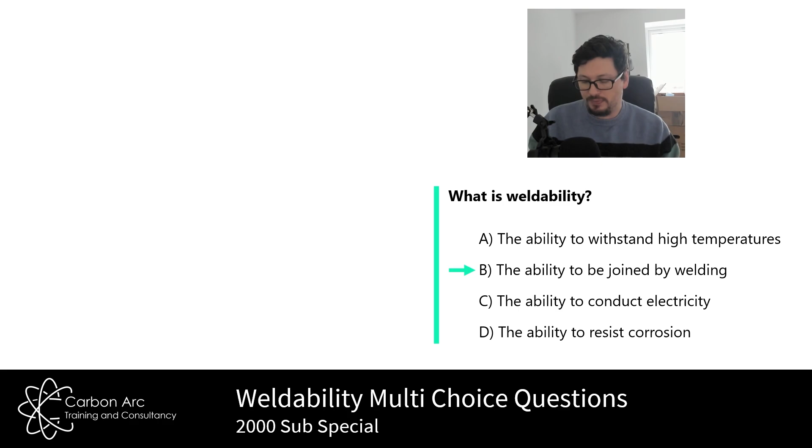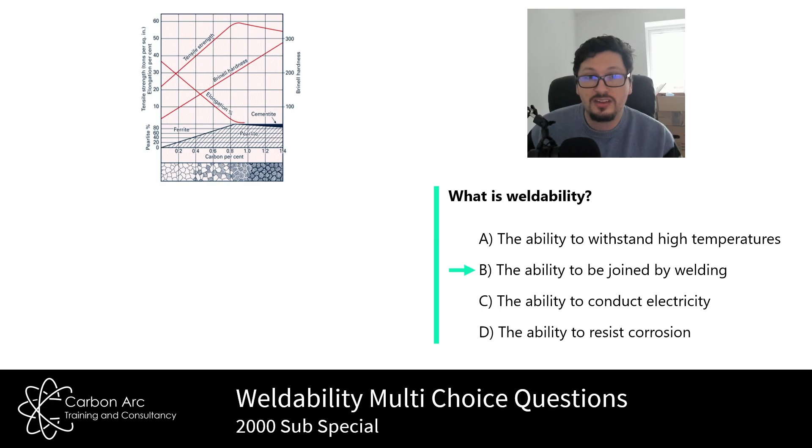Other questions that come up around this are things like: what is the term for the ability of a material to be welded without cracking? That would be weldability—same answer, different way of questioning it. Because we've got that increase in hardness, the lower the weldability, the more likely it is to crack because it has a higher carbon content.

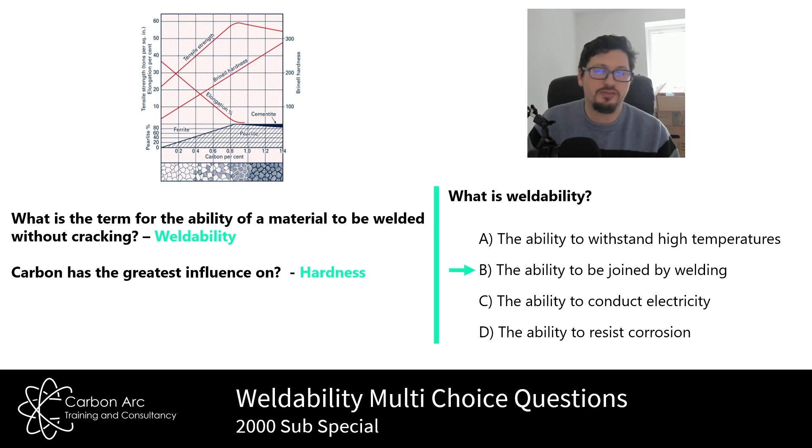Carbon has the greatest influence on hardness, right? Strength is always there because we add carbon to the system in order to give us strength. But really, in weldability we're worried about the hardness value of that grain structure it produces. An increase in carbon will require an increase in preheat. So by far the biggest control we have here is: as carbon content goes up and weldability comes down, we increase the preheat value to get more heat into the structure, so it cools slower and is therefore less likely to crack.

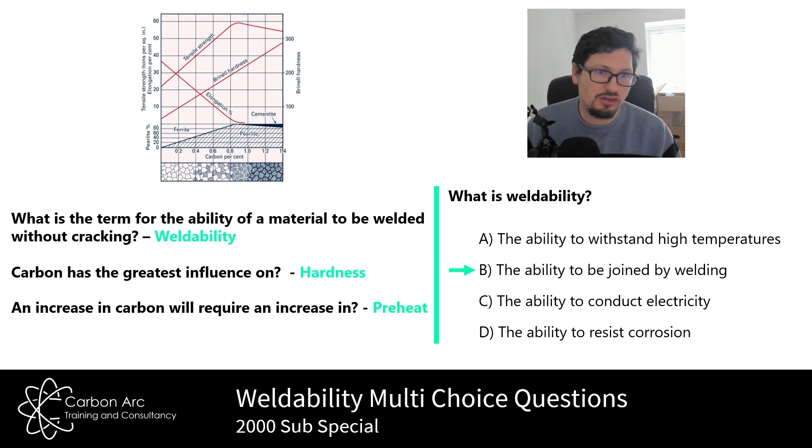So, second one: which factor does not affect weldability? I've seen this question around quite a lot. It's a difficult one because I would potentially err on the side of everything affects weldability to a degree. But if you get a question like this, 'which is the least likely' would be a good way of answering it. So how could we look at this and drive it forward? Which factor does not affect weldability: material composition, welding process, ambient temperature, or welding position?

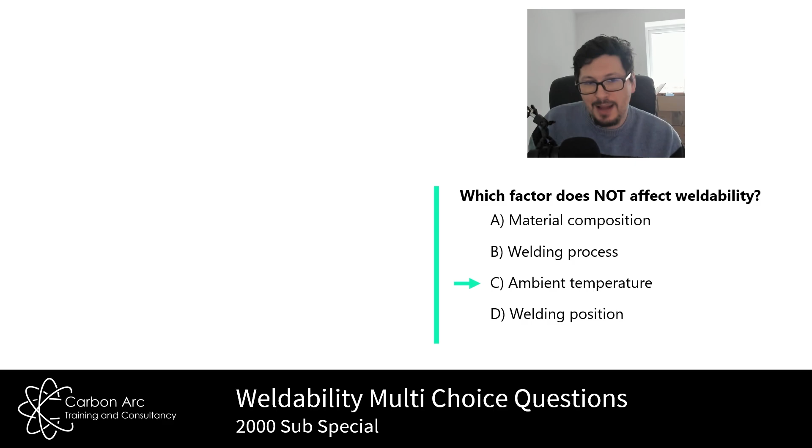If we've already decided that weldability is the process in which we join materials, and good weldability needs less control while lower weldability needs more control, we can use that to ask: if I change these, what's likely to happen? I would go with ambient temperature as the answer. Material composition instantly triggers the question of alloying content—something with higher alloying content might have more carbon content, going back to that previous graph. So material composition is always going to affect weldability.

Welding process: different welding processes might affect the amount of heat input they produce, and if we're talking about preheat levels and heat into the process to stop cracking, some materials just won't weld with certain processes, or they're easier with others. So the answer is definitely not welding process. Ambient temperature—you could say if I've got a low ambient temperature I'm going to need a bit of preheat, but that's true for all materials, whether they have good or poor weldability.

You often want to get them above 10 degrees before you weld anything, to stop thermal shock and distortion issues. And the last one, welding position—well, welding position might affect welding processes, preheats, heat inputs; some welding processes won't work in certain positions. So the best answer here, I would say, is ambient temperature. It's not a great answer, but it's the best one.

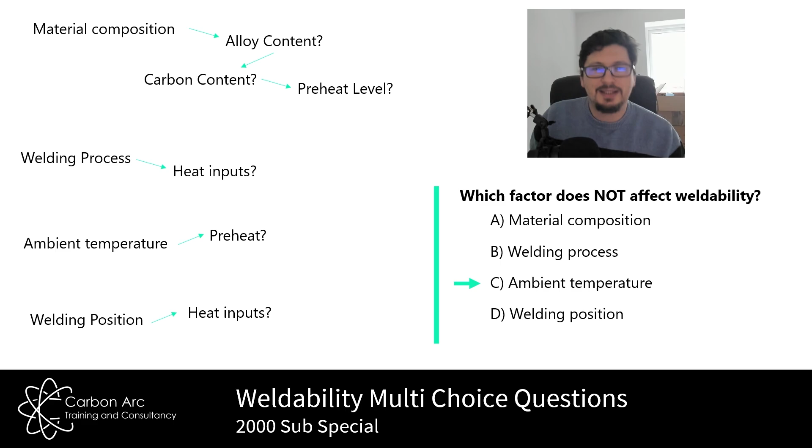Which material is generally considered to have good weldability? We've got cast iron, stainless steel, aluminium, and titanium. So again, weldability is the process in which we join materials together - either with low control and get a good result, or with lots of control to have a good result.

Which one would be good or poor weldability? Well, cast iron - it's got a high carbon content, multiple percentage points of carbon. Therefore it's probably low weldability. If you try to weld cast iron, very often it cracks, and that's it, it doesn't work. You need very high heat inputs, very slow cooling rates to really have a chance, and some grades just won't weld at all.

Stainless steel and carbon steel, your standard carbon manganese steels, are really quite straightforward for a lot of the lower strength value ones. For stainless steel you might need to back purge the root runs and things like that, but we have quite a range of welding processes that can be used. We don't need to preheat because there's a very low carbon content - it's generally quite easy to weld without cracking, because that's weldability, remember: the ability to weld without it cracking.

On the list here we've got examples of the things I've talked about: cast iron has poor weldability due to high carbon content. Stainless steel doesn't need preheating because it has a very low carbon content, especially grades like 316L. Aluminium - some grades hot crack, the 7000 grade doesn't weld because of hot cracking issues. Titanium requires a lot of care to keep it clean and oxidization free, so that's relatively difficult.

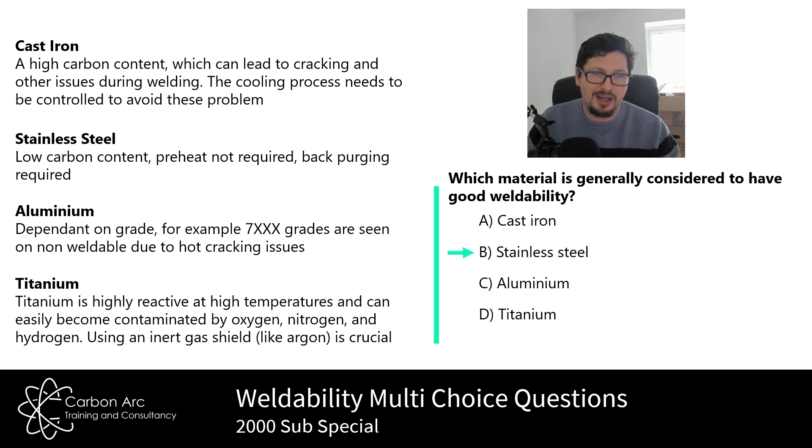Next: what is the main concern when welding high carbon steels? These questions have been sent in to me - I would maybe reword this as, what is the main concern when welding high strength carbon steels? Here are the answers: high melting point, formation of brittle martensite, low thermal conductivity, or high electrical resistance. The best answer here is high carbon content being more likely to produce martensitic structures, so the answer is B.

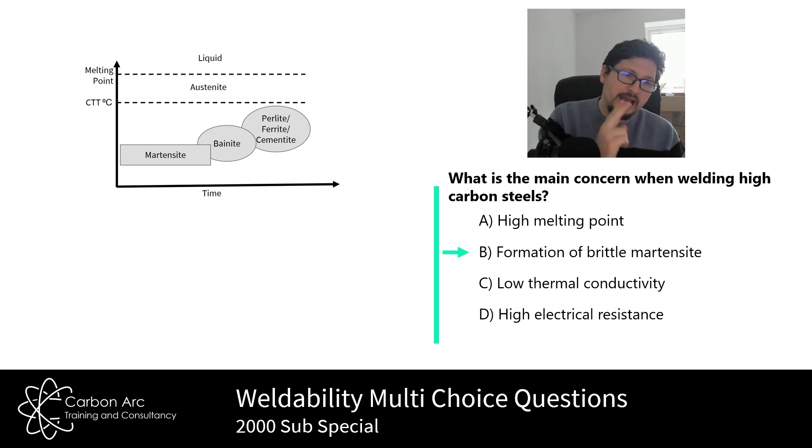If you want to know more about this, you need to learn the time temperature transformation graph. If you've been on one of my courses, you know I love this graph - I think it explains a lot around weldability, hydrogen cracking, and things like that. The controls we have in WPSs can be explained through a TTT diagram, and we already have a video on our page, Cooling and Its Effect, TTT Diagrams 101. Basically, as carbon content increases within a material, the martensitic band of that TTT diagram increases - it gets longer, pushing the whole graph to the right.

This means that for the same heat input, to try and get a pearlite, ferrite, cementite structure - a good grain structure - we're going to need a much longer cooling time. So we'll have to have a higher preheat value as we fall into that. High strength carbon steels generally need high preheat values and slow cooling rates.

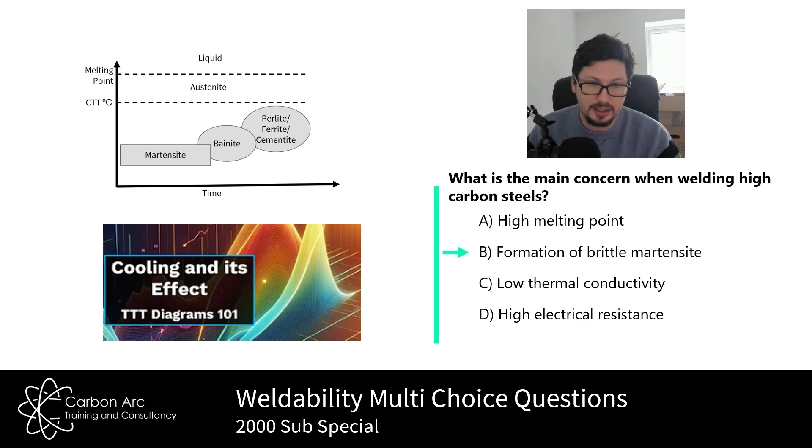Which welding process is known for its high weldability with most metals? Which welding process can we use across most materials relatively easily? My answer - the answers first if you're just listening - are gas tungsten arc welding (TIG), shielded metal arc welding (MMA), gas metal arc welding (MIG-MAG), and flux core arc welding. I would say the welding process that can be used over the widest range of materials most easily is TIG welding, gas tungsten arc welding.

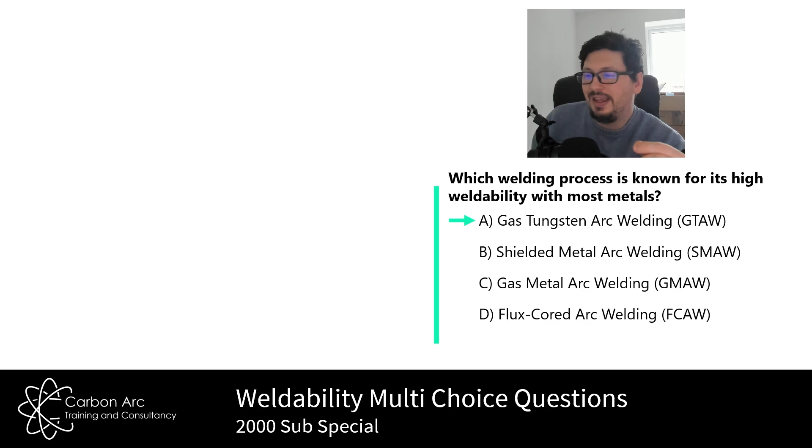The ability for TIG welding to use filler wire or no filler wire is second to none, because it allows us to weld materials that may be very thin, or where we don't have a filler material to join them, or adding filler might cause issues - lots of different reasons. On the slide you'll see a list of 7 reasons TIG welding is generally good for most things. The problem, though, is the deposition rate.

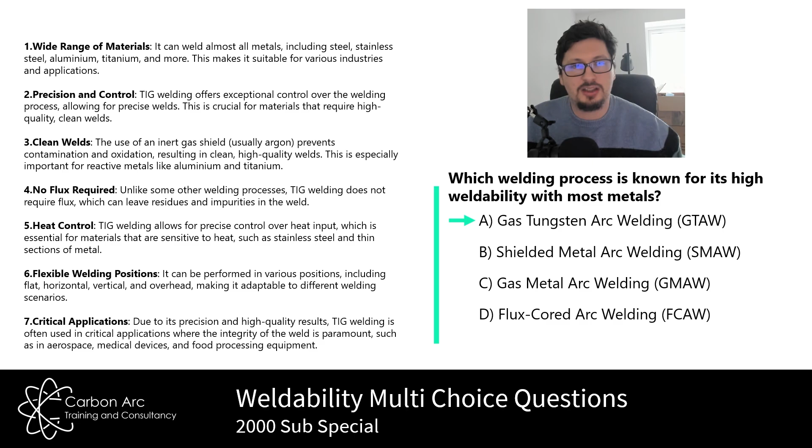The amount of weld metal we produce per hour is tiny compared to the other welding processes, which causes an issue when we look at cost. It also has a higher skill level requirement compared to other processes, so cost goes up again with skill and time - efficiency is relatively low. But generally, when in doubt, TIG weld it, and you should be able to control the process enough to overcome weldability issues and weld the material.

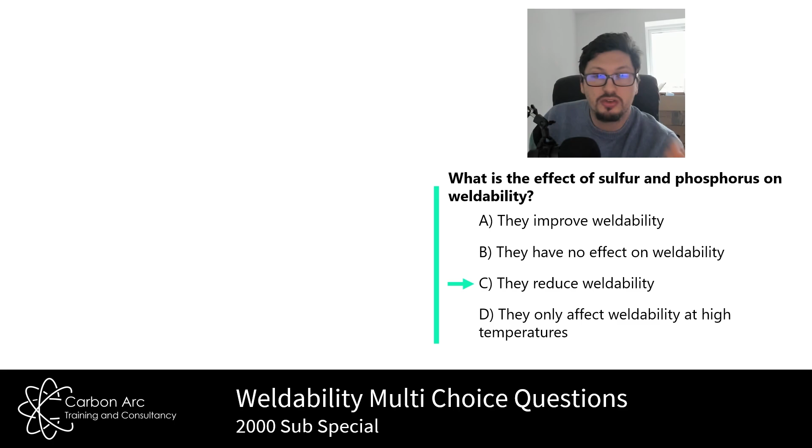Next one. What is the effect of sulfur and phosphorus on weldability? So will they improve weldability? They have no effect. They reduce weldability, or they only affect weldability at high temperatures. So they do have an effect on weldability, and they're for two different things, okay? But they're going to reduce the weldability of our material, okay?

I think here I've got phosphorus, okay? It's a residual element, which means we try to get rid of it as much as possible, right? The thing here with phosphorus is once we weld it, it generally produces what we call cold shortness, which is when we take a material and we try and form it, we try and bend it through, say, 90 degrees, and they crack, okay? High phosphorus materials, we don't really want that.

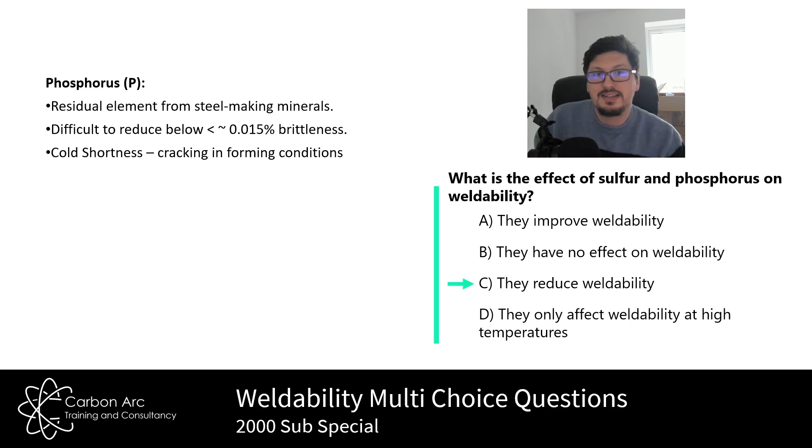Now, sulfur connects into a lot of failure mechanisms in different ways, okay? The most common one we talk about sulfur with is solidification cracking. And again, we try to remove sulfur in steels we know we're going to weld as much as possible. And this is where a lot of cost enters the system in steel manufacture to drive the sulfur level down.

So sulfur mainly is solidification cracking, but has a play in lamellar tearing and sort of inclusion creation and stuff like that. Yeah. Solidification cracking, lamellar tearing, inclusions, sulfur, non-metallic sulfur is our issue. Yeah.

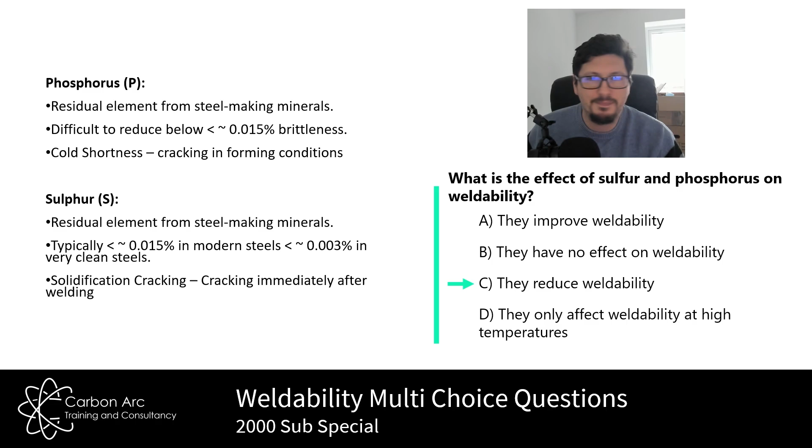Which of the following is a common weldability test? So before I give an answer, right, yet again, ask the question, what is weldability a measure of? It's the ability to weld it without cracking. Why do we get cracking? Well, we get cracking because we have a high carbon content, which then leads to potentially a martensitic structure, which is more likely to crack. So hardness values go up with a martensitic structure, right?

What test is going to find hardness values? All right, our answers here are tensile test, Charpy impact, bend, or hardness tests. Yeah, so because we understand the process of what weldability is, we just know the hardness test is going to be the answer, right? But again, on the slide here, we've got tensile tests. So tensiles are used to understand yield, tensile, and elongation of materials.

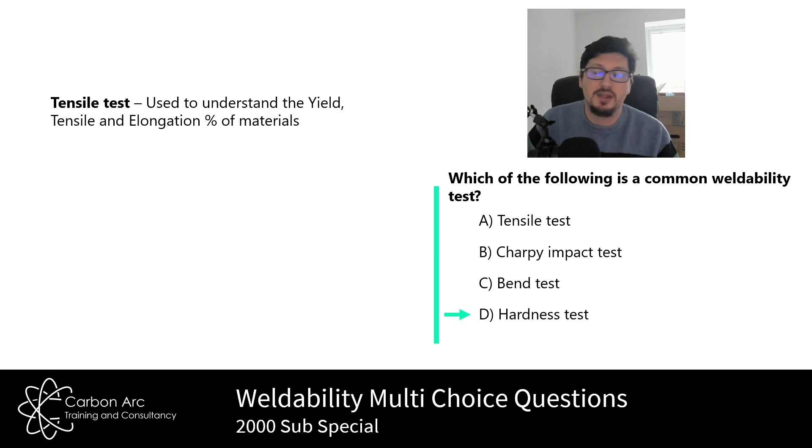Charpy impact tests are used to understand the transition point between ductile and brittle materials at a test temperature. So we have a dropping temperature, which then finds that point at which it becomes brittle, and we don't want to go past that. We've got our bend tests, which is a qualitative test used for understanding ductility, and our hardness test, which says, okay, how hard is this material after welding? And we can test in the base material, the heat affected zone, and the weld metal.

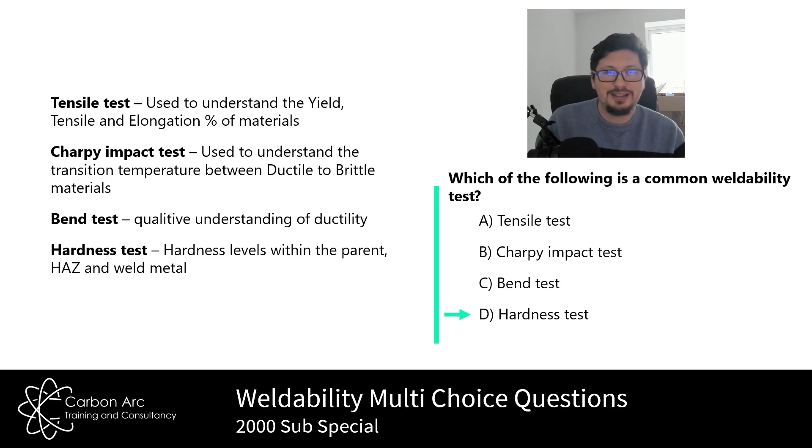Our different standards give us different levels for this. You know, if you look, say, in 15614, the ISO spec, it's saying a hardness value of 380 for sort of normal materials, so normal carbon steels. Can't go above 380 hardness, because above 400 we're likely to have martensitic structures. So we can hardness test something, and if the parent material is really hard, the probability of weldability being poor is increased.

Okay, so what is the primary, I can't even say it, you know. What is the reason for preheating before welding? So slowing the cooling rate, if we think about a TTT diagram, is going to push us into the pearlite, ferrite, and cementite regions. We don't want to get into martensitic regions.

So preheating adds heat, which slows the cooling rate. That can be helped if we then add blankets on top of things and try and keep the heat in for as long as possible. But by slowing the cooling rate, by keeping away from the martensitic regions, we are going to reduce the risk of cracking. Yeah.

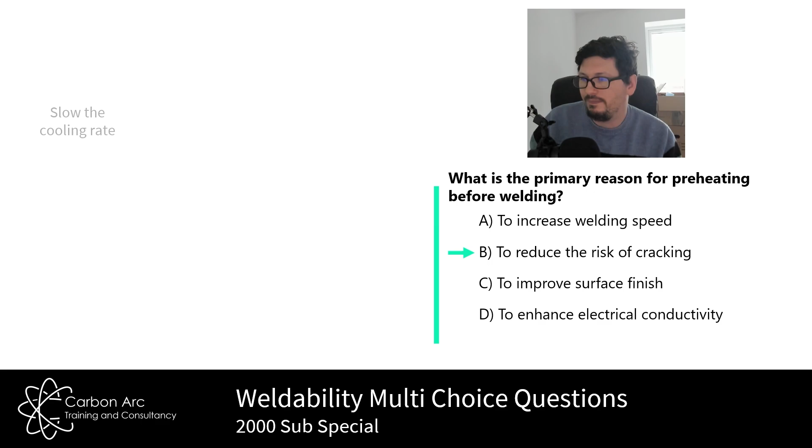Some materials like a 690, you're going to need to have a high preheat and a very slow cooling rate. So you put a relatively high preheat in place, you try to weld it relatively hot, and when you finish, you cover it in fire blankets and you just let it cool over hours, maybe a couple of days, and then take the blankets off, and then hopefully it hasn't cracked. Yeah. So again, slowing the cooling rate.

Think of our TTT diagram and how that's affected by carbon. As carbon rates go up, the TTT martensitic band gets bigger, and we need to slow cooling more, right? Now, preheat is calculated using 4 different things. Okay, so material thickness, because the thicker the material, the faster it will cool.

Now, we use a term here called combined material thickness, which is measuring all the heat paths away from the weld itself. So if you have a butt weld, you have 2 material thicknesses, so your combined thickness is 2 times the material thickness. If you have a fillet weld, it's 3 times the material thickness.

Okay, the heat input that you're going to put into the steel when you're welding, and then the hydrogen scale, which is a factor of the welding process, which tells you how much hydrogen is likely to be produced during that process. Okay, so if you use all 4 of them, you can use a standard called EN 1011, which will then give you a preheat value, which then helps you reduce the risk of hydrogen cracking and brittle materials in general.

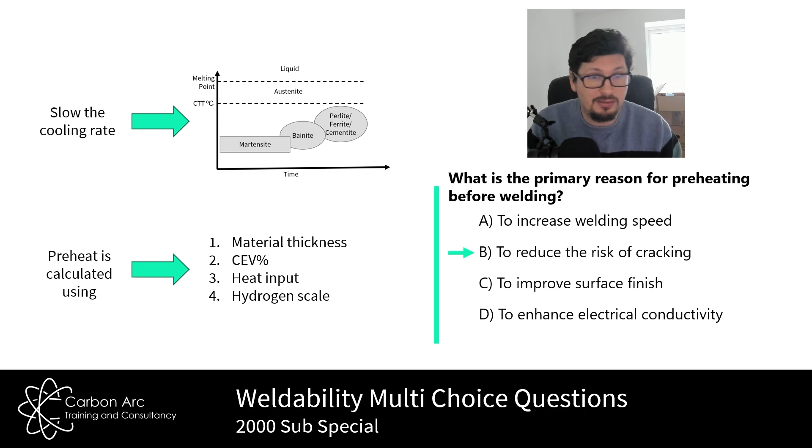Okay, here we've got one which is, which alloying element is known to improve the weldability of steels? Now, weldability is the ability not to crack, so we want to reduce the amount of carbon in our system as much as possible, and we do that by using manganese. Okay, so your carbon manganese in your system means you can get more strength but reduce the effect of hardness on our process.

So on the slide here we have the main elements we think about in carbon steel. So iron is all right, but it's not good enough. It doesn't have a high enough strength for engineering. So we need to add carbon in. Now, the way I describe this is like, right, if everything was just iron, it's like your body without the skeleton. It'll just be a pile of flesh on the floor. Not the nicest thing to think about, but we're not very useful.

Yeah. So we add a bit of carbon, we add a skeleton to our steel, which then holds that soft material upright and allows it to move and have some structure. So now we have the best of both worlds. We have the malleability of the iron, but the strength of the carbon. But if I keep increasing carbon content, I keep increasing the skeleton in my body, eventually I just become too rigid. I'm too hard, I've got no ductility, I can't bend my arms and move around, so I'm then useless, right?

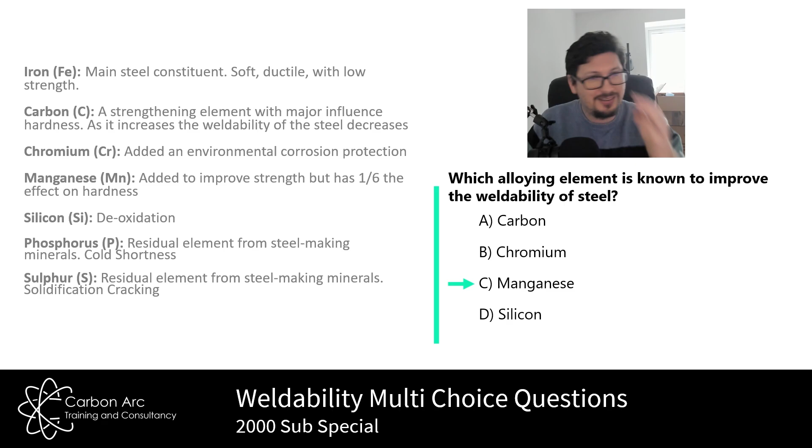Another answer on this list is chrome. So chrome is used as an environmental corrosion protection. So in stainless steel, we have chrome and nickel. Chrome is for your environmental protection. Nickel is for your acidic attack. So by having them two together, it doesn't rust in the air, but then it isn't corroded by acids and stuff in production in petrochemical plants or pharmaceuticals. So generally we add manganese to increase strength without increasing hardness, and therefore we maintain weldability.

Okay, so that is our few questions on weldability. You can see we're always thinking about what is the effect of what I'm doing and how is it going to increase the likelihood of cracking. So if I increase carbon, I increase cracking potential. If I drop out the carbon and replace it with manganese, I'm more likely to have strength with the reduction in carbon content. Yeah, so that's how we look at carbon, how we look at weldability, and how we then drive forward the changes in our process to be able to reduce cracking.